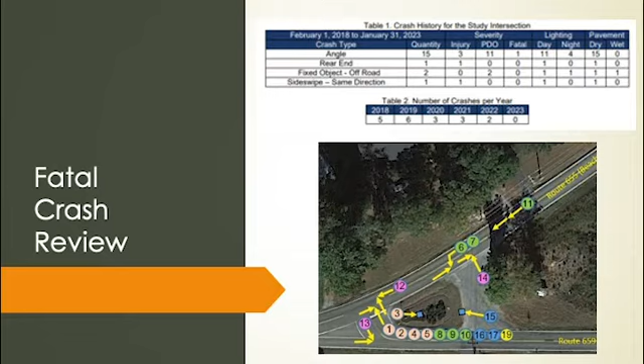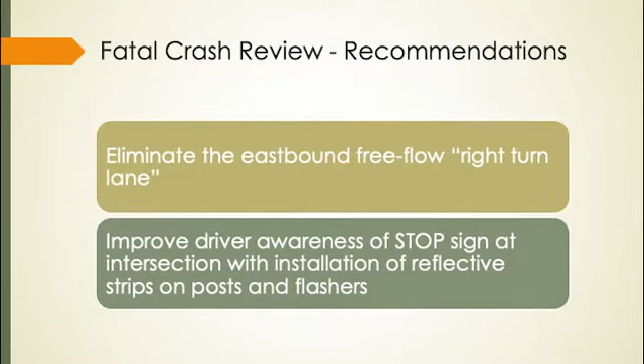So with that crash pattern, the two recommendations that came out of that fatal crash review were to provide additional awareness of that stop sign on Riverway, so using additional signs that we now have flashing lights out there on the stop ahead and the stop sign, and some pavement markings to bring more awareness to that stop sign for drivers. And then to attempt to eliminate or reduce the issue with not being able to distinguish drivers on Beach Road and what direction they were going. We attempted the bowling pins, as Mr. Carroll mentioned. Obviously, that was not successful, which has led us to our next recommendation.

And what we're really trying to do here is change driver behavior, try to make people stop or slow down at the intersection so that a driver on Riverway can really tell, okay, this person on Beach Road is going to be stopped here, and what decision people are making, so that we're reducing decision making for those folks on Riverway, and they can understand what all the other drivers are doing and make an informed decision. And so our next step at this intersection is to convert it to an all-way stop. So it'll be a stop at all three approaches, both east and westbound Beach Road, and then the existing stop sign on Riverway Road.

And we did some turning movements. I know there's a lot of concern with larger vehicles there. Trucks hauling trailers or campers or things like that. So we did do some modeling of turning movements to make sure that drivers would be able to navigate the intersection with that all-way stop in place. So you can see some of those turning movements here.

And an important note to add before we implement this, we'll be doing some widening on the right-hand shoulder of Riverway as you approach the stop sign to make sure that drivers with larger vehicles have enough room to navigate that curve. And then the other thing that we're planning to do is eliminate some pavement right here where that free flow movement was, to make sure that drivers aren't bypassing the stop sign and that we're getting the intended driver stopping at all 3 approaches before entering the intersection.

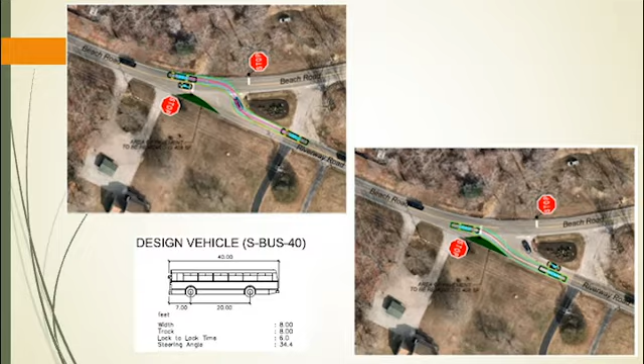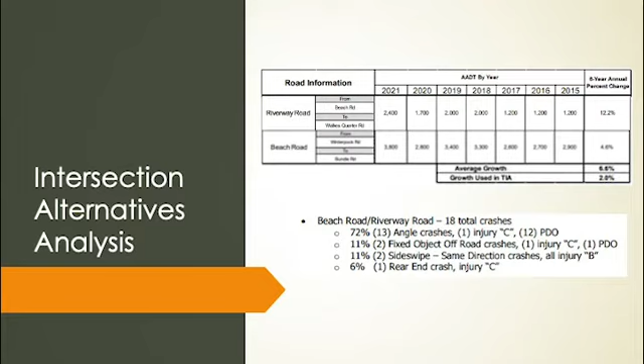So in January of '23, January of this year, the county completed a study for the intersection that evaluated potential improvements that would address traffic volumes, existing volumes, and then future volumes, and also address the crashes that are occurring at the intersection. Next slide, please. So we evaluated 4 potential intersection improvements. One is a conventional or signalized intersection. The second is a continuous green T. I'll explain that later. Third is a roundabout, and the fourth is a stop control intersection.

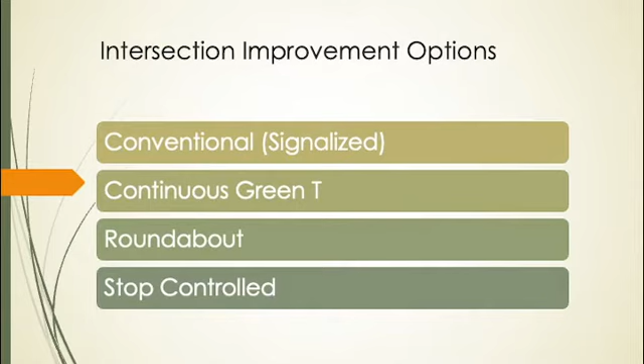So everyone's familiar with the signalized intersection, and I know everyone's familiar with the roundabout. We talked about those. The stop condition is what we have today, where people on Riverway have to stop before they turn onto Beach Road. The new one is called a continuous green T. We've got a slide for that.

So with a continuous green T, left-turning traffic merges into through traffic within a channelized, protected area. So if you're on Riverway and you want to make a left, you have to look to make sure no one is heading eastbound on Beach, but then you turn into this channelized area with a concrete island, and then you can merge into traffic. So you don't have to worry about what's happening to your right, you're just worrying about what's happening to your left. It's kind of crazy and not really a great fit for this intersection.

So you can see from the diagram, this is for a 4-lane road. It might be a great fit on Hall Street at Brad McNear Parkway, but not such a great fit here. But we'll talk about that more.

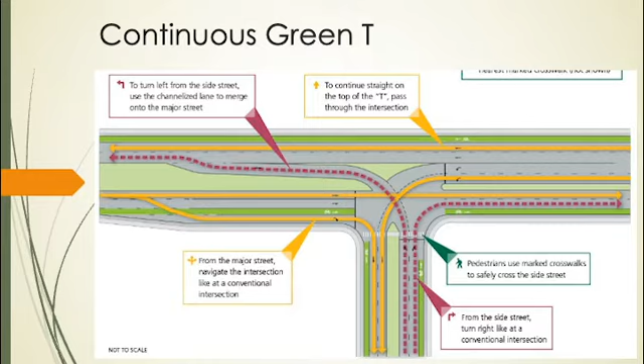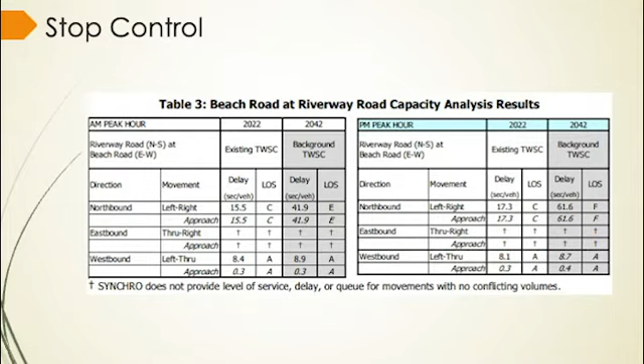So what's happening today at that intersection is people are on Riverway, come to the intersection, and they have to wait for traffic to go through on Beach. And they're waiting between 15 seconds in the AM and 17 seconds, which is really not bad. In traffic engineering language, that's like you got a C, which is average, right?

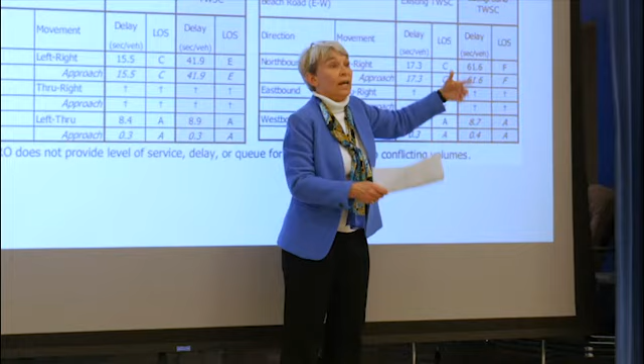But when we look at the projected volumes that we expect in the area, that wait becomes about a minute for people. And so as traffic comes up to the intersection, they have to wait a minute, more traffic's coming up, so the line is getting longer, so you're experiencing congestion and delay at the intersection, which is why it didn't score as well. Let's just make sure I've got everything.

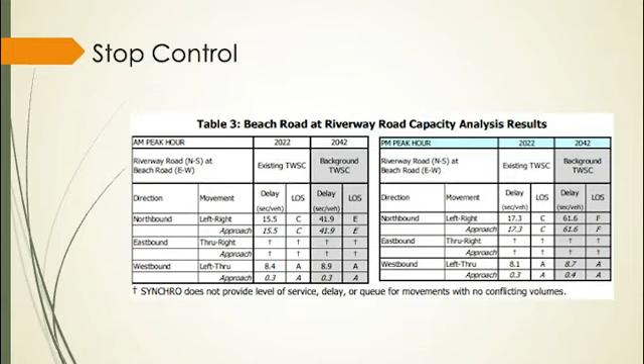Pardon? That's in 2042. Yes, 20 years. So when we design projects, we try to make them last for 20 years. That's the standard practice. It will take us some time to do the roundabout. If we had the money today, it would take us 5 years to get the roundabout constructed, if everything goes really well. So in the meantime, we're still trying to address the existing condition and existing problems that Rebecca described a minute ago. So congestion and safety, right?

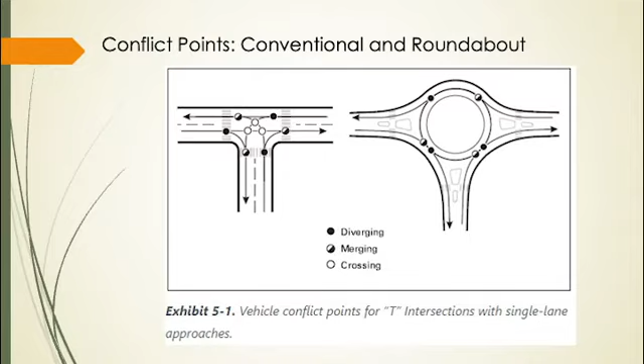So we also looked at safety. And to evaluate safety, we were looking at how well the options addressed or reduced conflict points. Conflict points are points in an intersection where vehicle paths cross and there's the potential for a crash. So on the left, that's a T intersection. There are 9 conflict points. And on the right, with the roundabout, there are 6 conflict points. The driveways in the influence of the intersection are still going to be there in both cases.

So they're weighted. And the problem with the continuous green T is it doesn't eliminate the angle crashes at the intersection, which is really what we've got the problem with here. So the roundabout is really the better solution for safety. So with all that in mind, the long-term recommendation, which you saw at the beginning of the meeting, is the roundabout, and that's our conceptual layout. Some people notice that we do show a bike and pedestrian trail on the north side of Beach Road. That's consistent with the county's bikeways and trails plan.

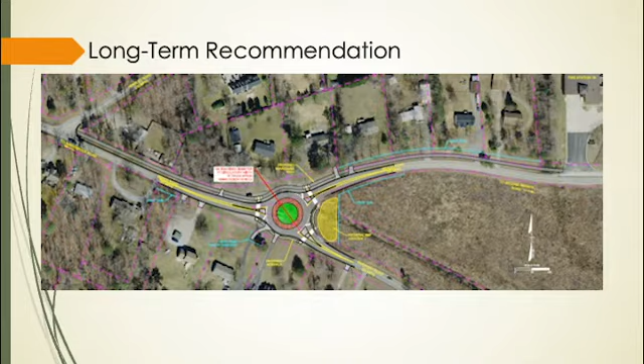And we are also, next slide, currently starting design on the roundabout, but we don't have it funded at this point. VDOT and the county have both submitted funding requests to try to get the money that we need to build it, but we don't know if we'll be successful getting the funding at this point. And like I said, if we do, it'll take us probably 5 years from when the funding is made available to actually get the project built.

And VDOT, I think Rebecca already mentioned, is trying to install the three-way stop, or the all-way stop, by the end of the year. And as part of that, we'll have portable message boards in advance to let drivers know. We're planning to deploy temporary rumble strips in advance also to make sure drivers on Beach are alerted to that change in traffic pattern.

I think with the stop condition, it will slow traffic down in the peak hours, which seems to be a general consensus that people need to slow down. So that will accomplish that. And with the volumes we have now, I don't think that you're going to see terrible queuing like we were showing before. The queuing on Riverway right now is 15 seconds, level of service C. It's not too bad. I don't think we'll see anything too different.